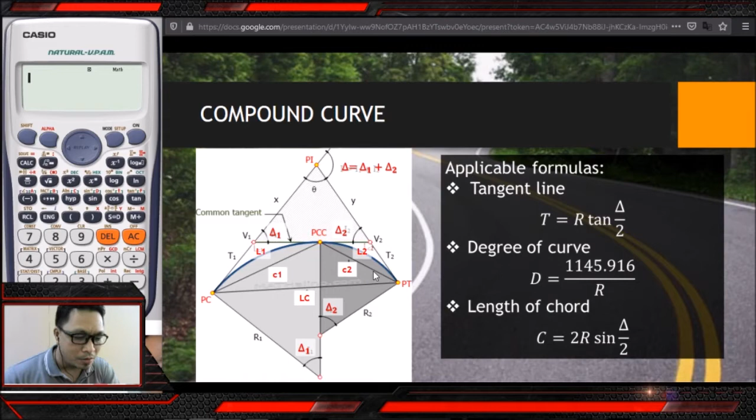Okay, so let us try a sample problem.

So, the elements of a compound curve as follows. We have the first delta. So, unsa man ang delta? This delta is what we call the central angle, the central angle or the intersection angle for the first simple curve. So we have delta 1 equal to 18 degrees. For the second simple curve, that is 23.5 degrees.

Then, the degree of curvature or degree of curve of the first simple curve is 2 degrees, while the second is 4 degrees. So, we need to calculate the following. If the stationing of PI is 42 plus 089.6, use the arc basis. We are going to determine the radius of each circular curve, the length of tangent on each circular curve, the stationing at PC, stationing at PCC, then the stationing at PT.

So, from this given problem, solving for radius. We have a formula for the degree of curve. If you might recall, the formula for the degree of curve is D equal to 1145.916 over R. But since R is our unknown, we need to simplify the formula to solve for R. We have the value of the degree of curve for the first curve, D1, which is 2 degrees. So, to solve the radius for the first circular curve,

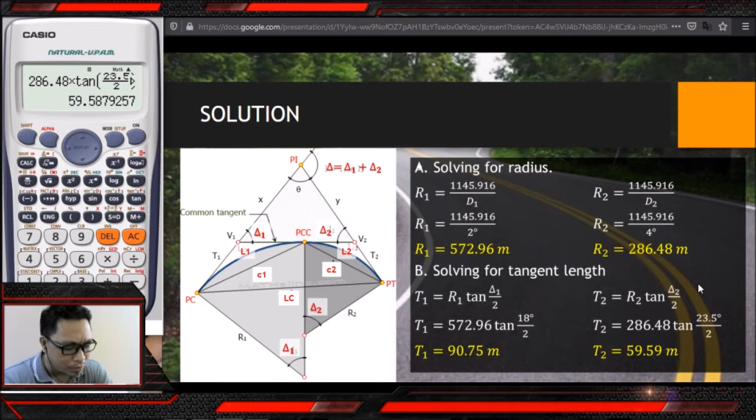While for T2, 286.48 times the tangent of 23.5 divided by 2. So, the answer is 59.59. So we have solved B, which is the tangent length of each individual simple curve, each circular curve. Next, let's go to C, solving for the stationing at PC.

As you might see, class, on this figure, the given is the stationing of PI. The station of PI is 42 plus 089.6. In order to solve the stationing at PC, you need to determine first the length of T1 and the length of X. To solve PC, take the stationing of PI minus the length of X and minus the length of T1. So, stationing at PC is equal to station PI minus the sum of T1 plus X. We don't have the value of X, only T1, so we need to determine X first.

To solve that, we need to make use of this triangle. Given is delta, the sum of two central angles, delta 1 plus delta 2. So how will we get this theta? Since this one is 180, 180 minus delta 1 minus delta 2, so we have 180 minus 18 minus 23.5. The remaining angle is 138 degrees, 30 minutes.

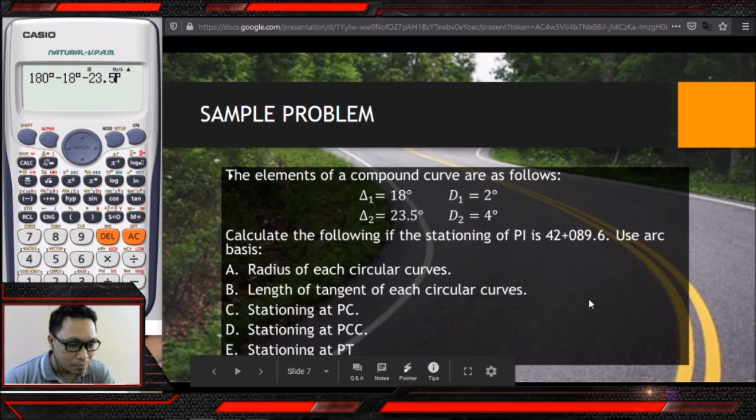First, we need to get the common tangent. And the common tangent is T1 and T2, so common tangent is 90.75 plus 59.59. So, asa man nga value? So, gikan ni sa value sa kadtong letter B nga atuang gisolve ganiha, no? Kini, no? T1 and T2. Okay, so if you sum up this one, we have a common tangent length which is 150.34.

So using the sine law now, considering this triangle, we have X divided by sine of delta 2, and that delta 2 is 23.5 degrees. Dayon, the length of the common tangent, which is 150.34, over sine of 138 degrees and 30 minutes. Okay, so the value of your X now should be 90.47. So the length of X is 90.47.

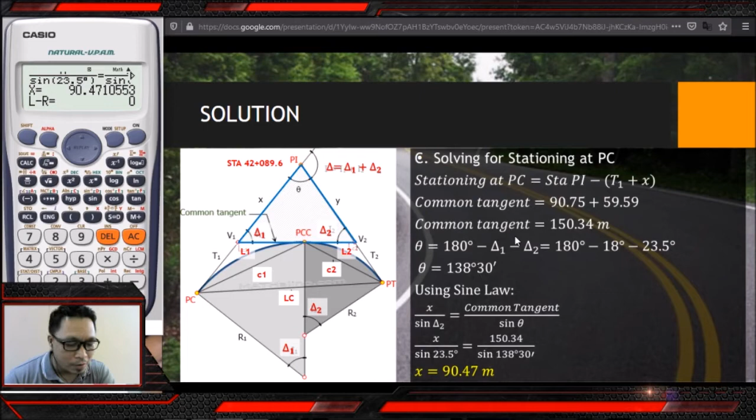So naa na tay value sa atuang X, no? So we will be able to determine the stationing at PC now. So given the value of X, which is 90.47, and as you might recall, class, pag ang stationing gani is given as 42 plus 089.6, it means that kanang plus diya is just simply designated as mura siyag comma, no? So therefore, it means nga ang 42 plus 089.6 means 42,089.6. Okay. So we will now determine the PC.

So solving for PC, we have 42,089.6 minus the T1. T1 nato is 90.75. And your X, butangan sa nato siya og parenthesis. Plus 90.47. So the stationing should be... Oy, what happened? 90.75 minus 90.47.

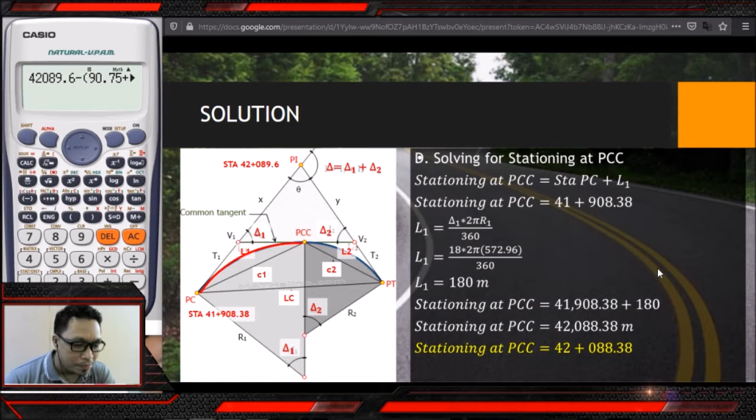Okay, so the answer is 41,908.38. So you cannot write a stationing in this manner. So you should write the stationing as 41 plus 908.38. So that is the stationing for PC. Okay, so let us go to solving for the PCC. So to solve for your PCC, we need the stationing at PC and the length of your curve. Diri dampita sa imuhang L1.

So to solve for L1, we will make use of the formula L is equal to delta times 2 pi R over 360. So this is only limited for the first curve kay length raman sa curve, sa first curve, ang atong i-determine. So to solve for the PCC, stationing at PC plus L1. So that is how to solve for the PCC. Then, as you might recall, the value of your stationing at PC is 41 plus 908.38. So we will express this one in the 1,000 manner.

But first, we need to solve for L1. To solve for L1, gamit na ta ang formula. We have delta 1 which is 18, times 2 times pi, times the R1 or the radius for the first simple curve, 572.96, divided by 360. So your L1 is equivalent to 180 meters. So balik ta sa solving for the PCC. 41,908.38 plus 180 is equal to 42,088.38. And to express the stationing at PCC, that is 42 plus 088.38.

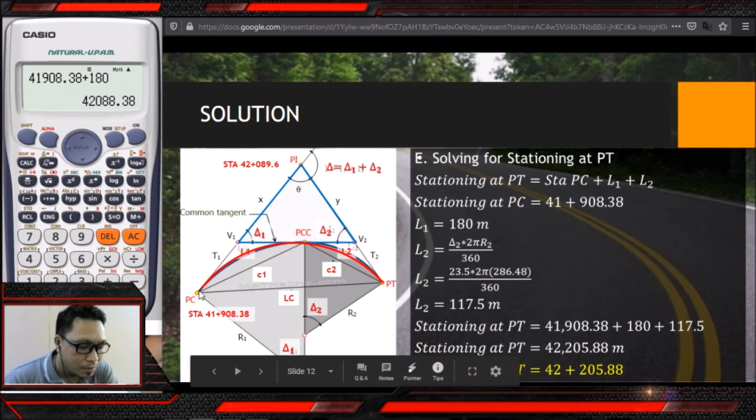So that answers the question of why the operation is like that. Okay, so next let us proceed to the next problem: solving for the stationing at PT. To solve for the stationing at PT, what we need is the stationing at PC, then the length of the first circular curve, then the length of the second circular curve, L2. So L1 plus L2. We all know that L1 is equivalent to 180, which we solved previously. So what we need to solve now is L2.

So L2 is delta 2, 23.5, times 2 times pi times the radius for the second simple curve, 286.48, divided by 360. So L2 now is 117.5. Okay, so solving for the stationing at PT, we have the stationing at PC, which is 41,908.38, plus L1 which is 180, plus L2 which is 117.5.

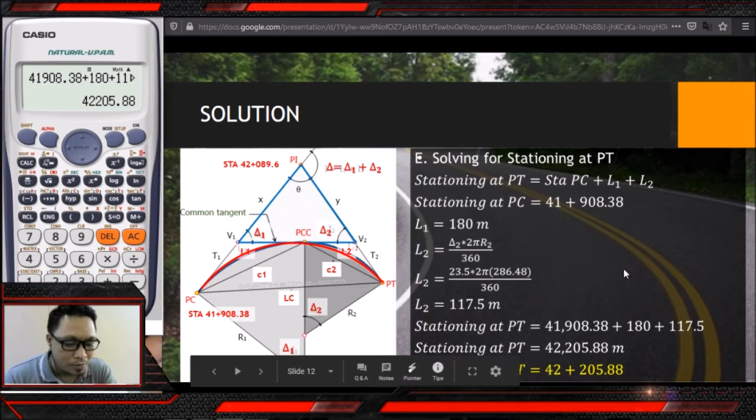Okay, so the stationing at PT is 42,205.88. To express it in proper stationing form, that is 42 plus 205.88. Okay, so that ends the topic of the compound curve. Yay! We're done with the compound curve. Next is the reverse curve and the spiral curve.

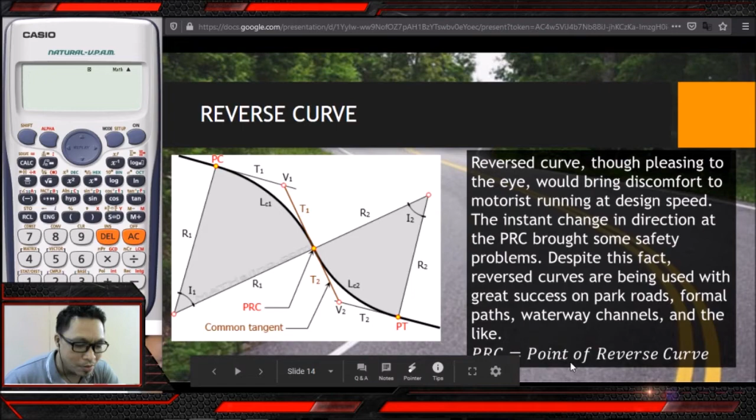So let us recall that PRC is the point where the two different circular curves connect in the reverse curve. And that PRC is what we call the point of reverse curve.

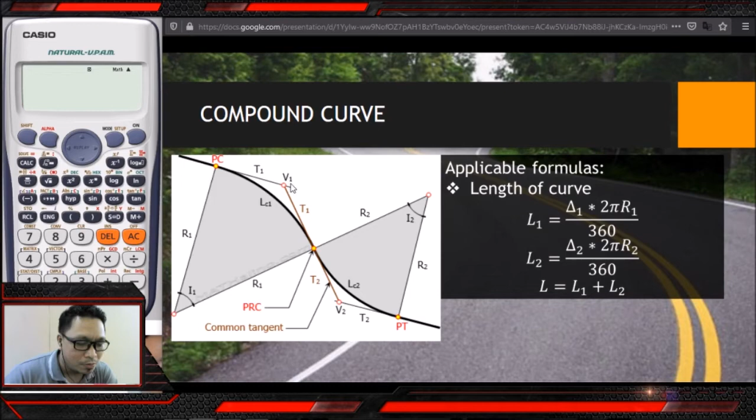So what we need to compute here is the stationing of the second vertex. So unsa man ang pasabot ng vertex? Ang vertex is the point on which, let's say on this first simple curve, the vertex is what we called the point of intersection or the PI. So karon, since we are talking about two combined curves, dili na point of intersection ang tawag, kundi vertex. So the first one is V1, then the second is V2.

Okay, so na-given ang stationing sa first vertex, which is 16+523.37. So ang gipangutana dire is, what will be the stationing at the second vertex? Based on the figure, given naman ang stationing sa V1. To solve for the stationing of the second vertex, you need the values of T1 and T2, or the total length, which is the common tangent. Ang nagiven nato is ang mga values sa azimuth.

Now, if you draw the azimuths, you can produce a certain angle such as this one, 59 degrees 44 minutes. Asa man gikan? Kung mag-draw ka og azimuth from point B, madraw nimo ang BC. BC azimuth is 252 degrees 45 minutes. Then sa point C, CD is 312 degrees 29 minutes. So 312 degrees 29 minutes minus 252 degrees 45 minutes gives 59 degrees 44 minutes.

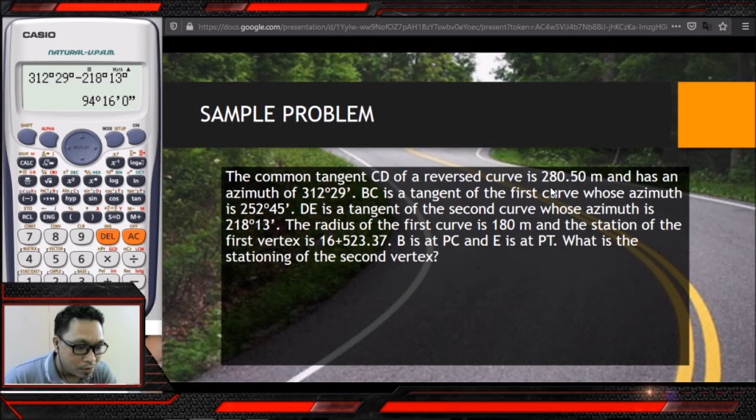Given ang radius sa first curve, which is 180, so we will now determine the value of T1. To solve for T1, gamit ang formula T equals R1 times tangent of 29 degrees 52 minutes. The common tangent is T1 plus T2, and given ang common tangent, which is 280.50. So T1 plus T2 equals 280.50. T2 is R2 tangent of 47 degrees 08 minutes.

So asa man gikuha ang values? For T1, take note, this is half of 59 degrees 44 minutes. 59 degrees 44 minutes divided by 2 is 29 degrees 52 minutes. So it's R1 times tangent of delta 1 over 2, and here is R2 times tangent of delta 2 over 2. So 94 degrees 16 minutes divided by 2 is 47 degrees 8 minutes.

So naa na ta'y value sa R1. Substitute the value of R1, so you can solve now for R2. So 180 times tangent of 29 degrees 52 minutes plus R2 times tangent of 47 degrees 8 minutes equals 280.50. Shift solve. So R2 is 164.41 meters.

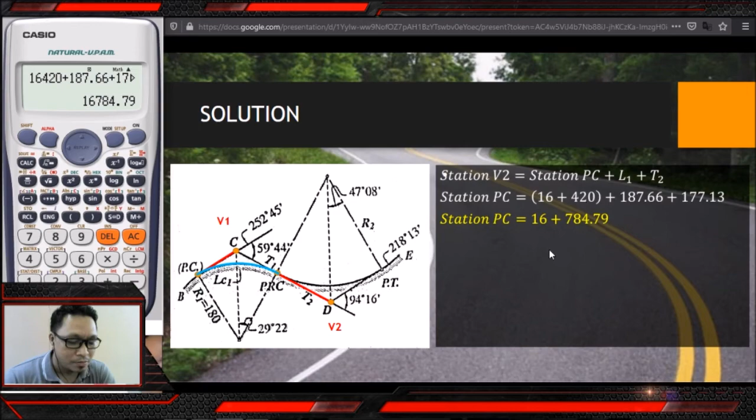Okay, so that's all para sa reverse curve. So nahuman na nato ang simple curve, ang compound curve and the reverse curve. So next na nato ang spiral curve. Alright, so let us continue. So para sa last part sa chapter 4. We are done discussing about the simple curve, the compound curve, the reverse curve, and lastly, we will be discussing now the spiral curve. Na-mention nako ang spiral curve last chapter, when we talked about the railway.

So, ang spiral curve is also known as the transition curve. As defined here, spirals are used to overcome the abrupt change in curvature and super elevation that occurs between tangent and circular curve. Most spirals are provided in order to have a smooth transition from straight to sudden change in direction. So railway curves are the most curves provided with the spiral. So why is it that railway curves are the most curves provided with spiral? Nganong sa railway man, dili sa highway?

Is because sa highway, kasagaran mga vehicles dili man sila similar sa train. Ang train is taas, then naay clearance nga gina-consider. Isa pa, the only thing nga ginaagian sa train is the railway. Once nga ma-out na siya sa iyang balance, posible mogawas ang train sa iyahang railway. So that is what we call derailment. Whereas sa highway, if ever mogawas sila, at least masalo pa sila sa shoulder sa kalsada. So there is still a safety factor in highways. So less magamit ang spiral sa highway.

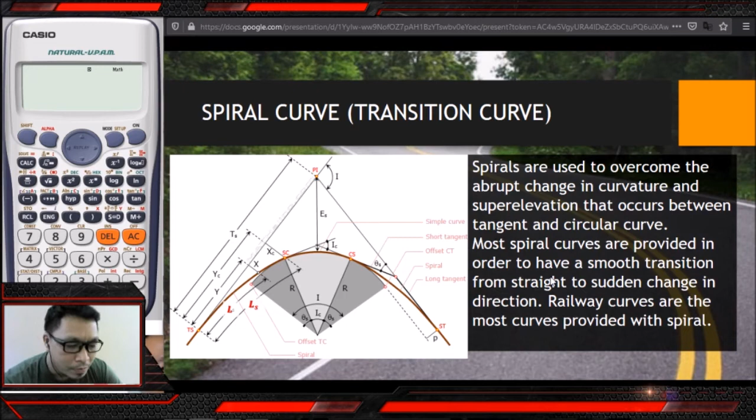Okay, so unsa man nga to ang focus nato sa spiral curve. So but first let us identify the following terms or elements sa ato ang spiral curve. So naa tay tangent. So wala gyapon nawala ang tangent. Naa tay spiral to curve. Okay, tangent to spiral, meaning these are the points that are mura siya og similar sa katong PC, PT, PI. But today

So since we are talking about the spiral, we will be talking about the boundaries. TS, that means tangent to spiral, the point where the spiral and the tangent line has been connected. Kanang nagkuan sila, unsa tawag ni? Nagdikit. Then we have the spiral to curve, which is the end point sa ato ang spiral curve, and also the starting point of the circular curve. So

Next is we have curve to spiral, meaning to say that is the end point. Kung sa simple curve, this is your PT. So curve to spiral, meaning from circular curve mag-start na pod siya to spiral. Kay duha man ni siya ka spiral. If ever na may tendency pod usahay nga isa lang ka spiral ang gi-provide. Naa poy usahay nga duha ka spiral, or let us say the circular curve is gitong-an siya og duha ka klase nga spiral. Okay. So CS, mao na siya ang end sa circular curve. Then mag-start na pod siya to another spiral.

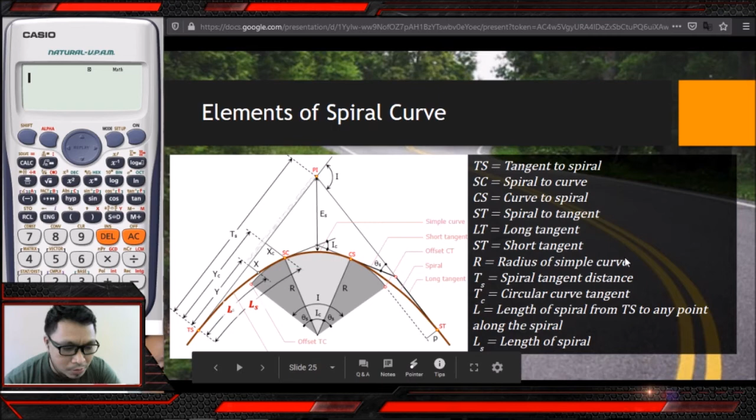Then we have the radius of the simple curve, this one. Then we have spiral tangent distance, TS, mao ni siya. Then circular curve tangent, kini siya, TC. Then length of the spiral from TS to any point along the spiral. Okay, L. Asa man ang L? This one. Then, length of the spiral, which is the length mismo sa spiral, gikan from TS to SC. Next, we have the PI, or the point of intersection between two tangents, starting from the TS to the point of intersection. So TS, PI, then ST.

Then we have I, the angle of intersection. But this is not actually what we call as the central angle. Ang central angle naa diri, IC. So ang angle of intersection is kini siyang part nga gi-include ang spiral curve sa ato ang circular curve.

So then we have length of throw, or the offset distance between the tangent of the circular curve and this spiral curve. So ang distance niya from the continuous line or the curve of the circular curve. So ang offset nila, that is what we call as the length of throw.

Then x, which is the right angle distance from the tangent to any point of the spiral. Let us say this is the spiral. Dayon mao ni siya ang imuhang y, or the tangent sa imuhang spiral. So the line which is perpendicular sa imuhang tangent sa imuhang spiral, that is what we call as the offset distance. That is x. While ang XC is the right angle distance from the tangent to SC.

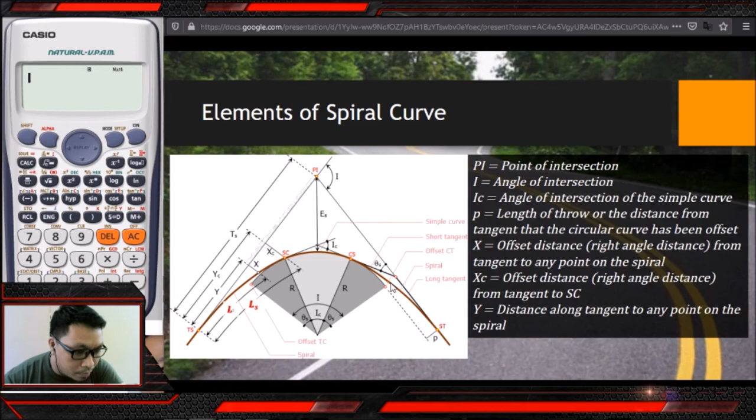Okay, then the degree of the spiral curve at any point can be determined by formula lang siya. Then we have DC, the degree of the simple curve. We all know how to calculate the degree of the simple curve. So the formula nga magamit nato dire is same lang gihapon sa previous: D is equal to 1145.916 over R.

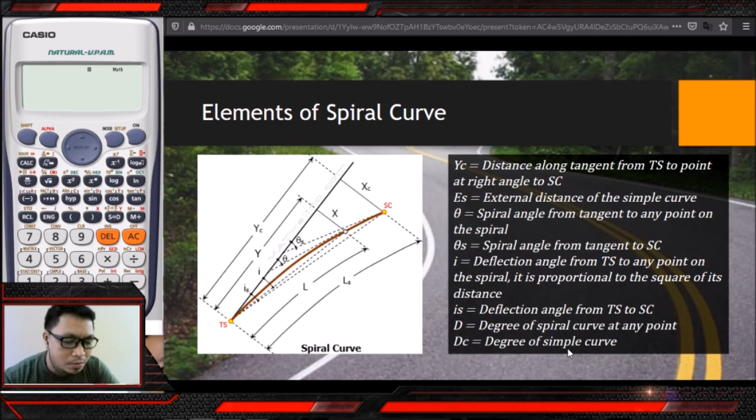Okay, let me introduce to you the following formulas that kinahanglan nato gamiton when it comes to spiral curve. Most of these formulas are only to calculate your y, then yc. Let us remember that y is the tangent distance at any point sa imong tangent. So to compute y, we have L minus L raised to 5 over 40 R squared LS squared.

Then to compute your YC, YC is the distance from your tangent if we project a right triangle or perpendicular line, limited lang siya sa SC. So YC is equal to LS minus LS cubed over 40 R squared. Unsa gani ng LS? LS is the length of your spiral curve. And L is the length of your spiral, the distance from your tangent, ning y, or partial.

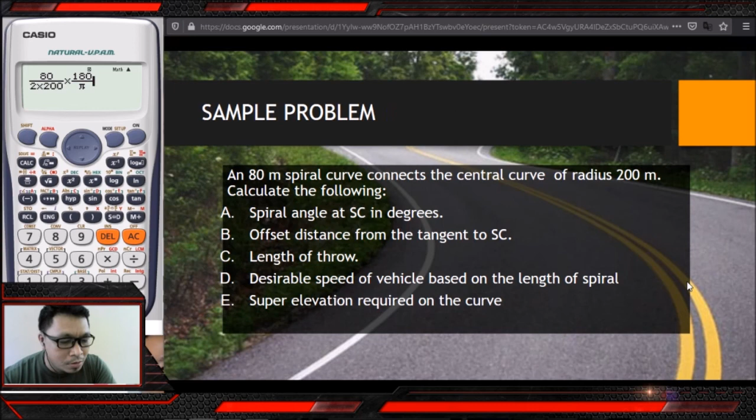Okay, so dayon times 180 over pi. And the answer is 11.46 degrees, no? So degrees na. So kung mubalik ta sa tong formula ganiha, kaya ang formula nato sa delta S, theta S is in radian, di ba? So para ma-convert nato siya into degrees, multiply nato siya og 180 over pi, no? So 1 pi, equivalent na siya into 180 degrees, no? Half sa rotation sa circle.

Okay, next is let us solve for the offset distance from tangent to SC. Meaning to say, since SC man, sabot ana kadtong sa entire length of the spiral curve. So, ang muna siya tong XC, offset distance niya. So, to calculate the offset distance, we have the formula LS squared over 6R. And ang ato ang LS is 80. Okay, so we have 80 squared divided by 6 times 200. And your XC therefore is equivalent to 5.33, no? So walay ka challenge.

So kung naa na kay XC, pwede na nimo makalculate ang length of throw, which can be calculated as 1/4 of the XC. So ang imong XC is 5.33, divide nimo na siya og 4. You have an answer of 1.33. Pwede pod nga gamiton nimo ni siya nga formula, LS squared over 24R, no? So we have 80 squared divided by 24 times R. Ang R nato is 200. Okay, so same ra gyapon ang answer, 1.33. So you can have either of these solutions sa pag-compute sa imong length of throw, depende sa kung unsay naa nimo nga given.

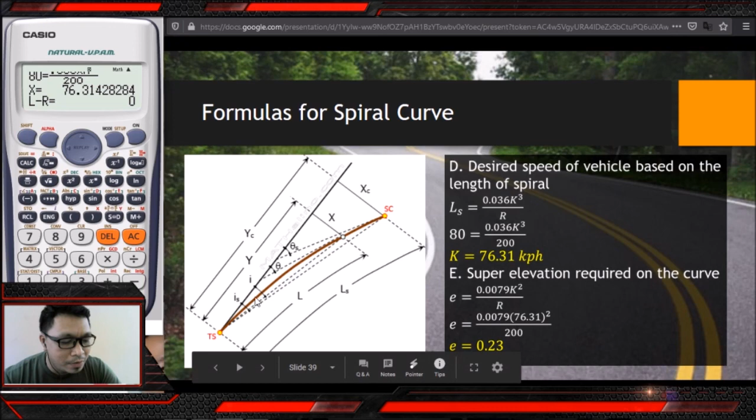Okay, so next is we have to calculate the desired speed of vehicle based on the length of the spiral. So given ang length sa tong spiral, we need to calculate the ideal speed. So using the formula LS is equal to 0.036 K cubed over R, no? So given na to, 80 is equal to 0.036 times K raised to cube, then ang R is 200. Then, shift solve. Okay, so that is 76.31 kilometers per hour. So, solve na nato ang desired speed nga angay gamiton as the vehicle passes on this length of spiral.

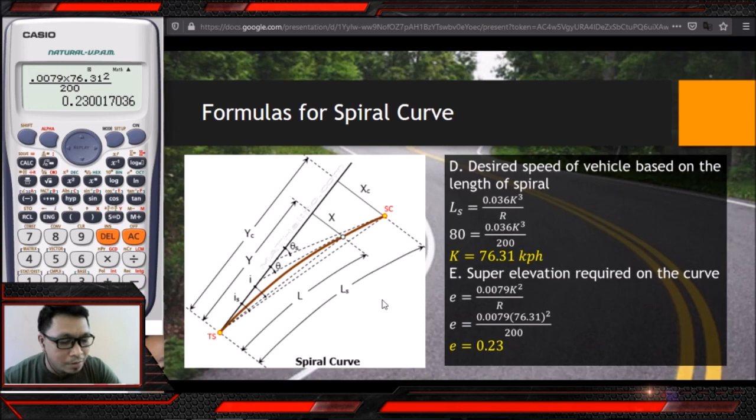Then, lastly, the super elevation required on the curve. So, to calculate the super elevation, we have e is equal to 0.0079 K squared over R, no? Okay, 0.0079 times, okay, dili siya 200. Ang K nato kay 76.31 squared, divided by 200. So the answer for our super elevation is equivalent to 0.23. And that's all, I think, para sa ato ang types of horizontal curves.

Anyway, if ever mangutana mo, sir, how about sa parabolic curve? Okay, ang parabolic curve, i-reserve na lang nako siya para sa inyong transportation engineering, no? Medyo taas-taas ang inyong coverage if ever i-include pa nako sa inyong chapter 4.

So, although practice makes perfect, kabalo man ta nga dili gid siya maka-perfect, no? Walay perfect, but God made you perfect.